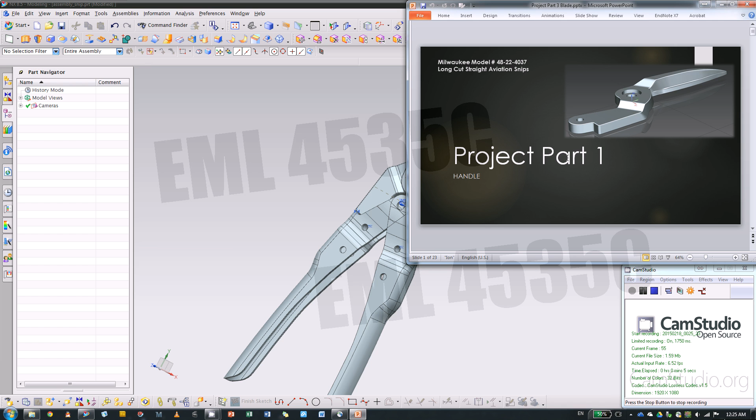All right, this is a video for the third part, the blade. So let's see the parts you'll be making. This is mainly two parts.

One is an extrude, and then the second one is a big swept. Once you finish this, you should be able to get a preliminary assembly, because this is symmetric, so you can just have two exactly the same parts and reflect to the other side, and that'll give you an idea.

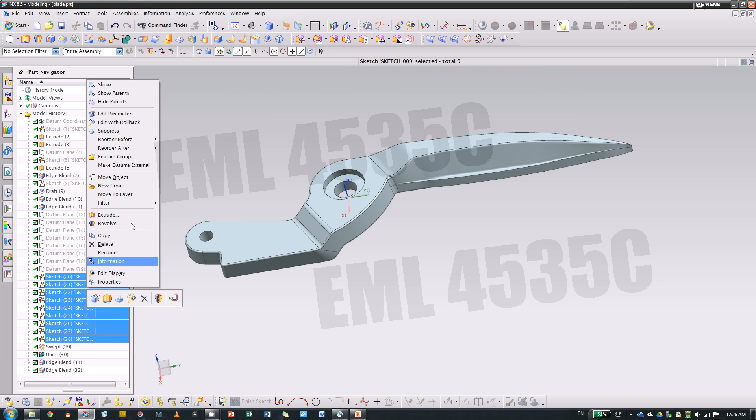Before we start, I'm gonna emphasize on one thing. Although I did say the dimension doesn't matter on your part, in this case the swept is very picky on the dimensions. If your sections are not good, or they don't align well, your swept would fail. You need to really follow the dimension in the slides.

Enough said, let's start with a new file. Model, I just put on the desktop. A blank file. Let's turn off the assembly. Let's leave one, that's the slides.

So again, we're gonna start with a sketch on the XY plane. Let's see the steps. Extrude, then we make a cut to get this sort of a step. Then we make this face a little bit tilted, it's called draft. Next we go for the swept. Those two are the guide curves for the swept.

Then we made seven datums. Why so many datum planes? Well, I need that many to get this shape. I tried three, but they don't comply well. So we're gonna put seven

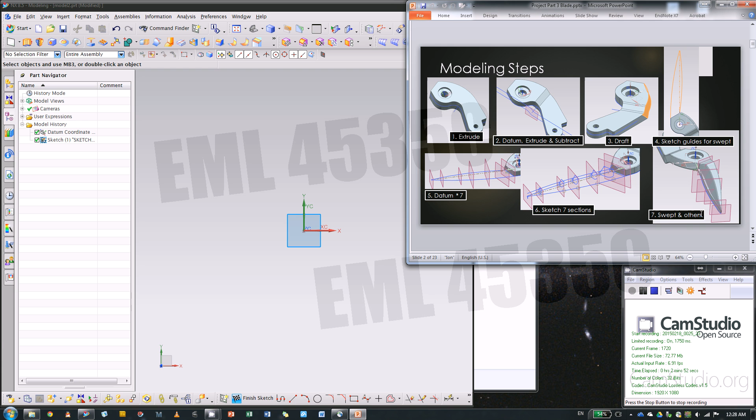sketches on the seven datum planes. Then we do the swept. So that's the major steps, and in between we have some edge blends.

All right, so that's the sketch for the extrude, and we need to zoom in a little bit. So again, the sketch.

Start with a circle on the origin. See, we have a smaller circle, 0.31 in diameter. So that's small, just fit. Then the second one, well this one, 0.56, click.

Next we could just use the profile tool. On the top, go down, then vertical. Then there's sort of a fillet, we can change that to arc. And that's another arc. I'm just going wild here.

And arc, come up, yeah, let's make a tangent. Then this is horizontal, go straight up. The last one is an arc. So that's the basic shape, and this corner is, of course, tangent.

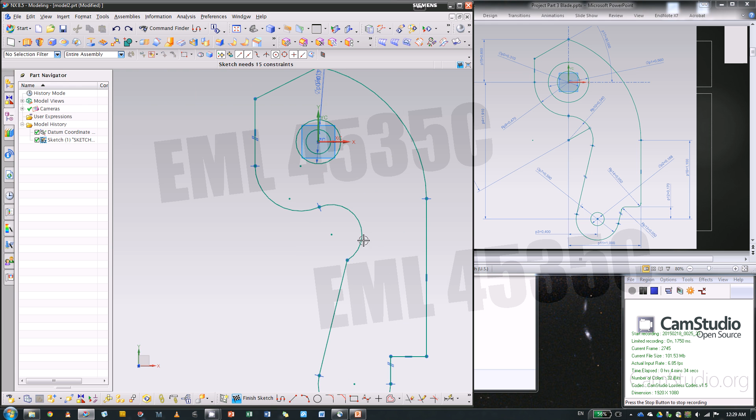Well, this is 12:30 in the morning, a.m. So I'm sort of dizzy a little bit.

So those two are parallel. I'm adding constraints first. Then tangent, that's all good.

Notice the top point, we have a dashed line that indicates this point is on the y-axis, and the same goes for this point. So what we got is point on y-axis. Apparently you can't pick that up, so use geometric constraint points on curve. Then we have 2 points that go on the y-axis, so constrain them to the y-axis.

Okay, that's one thing. Then this apparently should be concentric. Those are mechanical parts, so most of the time they are always concentric. Then the angle is 30 degrees on the top from horizontal, so 30 degrees.

And we have sort of a dashed line here that indicates this point is also on the axis. So need to look for the shortcuts. The shortcut is C. Because it's hidden inside, I'll just use keyboard shortcuts. C, then point on curve on x-axis. Then I think that's all for the constraints.

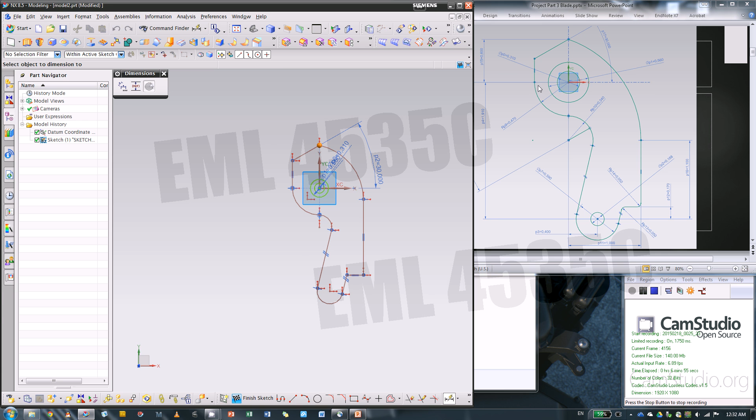Then we're gonna start with the dimension. Vertical ones, 0.6, 1.91. So shortcut, keyboard shortcut, that's D for dimension. From this point to x-axis, well you could click on the point, but it's better to click on your datum axis, which is x-axis, so 0.6.

Then from x-axis to, somehow I lost the zoom. Okay, from x-axis to where the center of this arc is, 1.91. Yep, it's very out of scale, so we can drag this point back a little bit, then drag this away a little bit.

Then we have another circle here, doesn't matter about the dimension. Vertical ones, then those on this side, on the other side, from this point to center of the arc, that'll be 1.1.

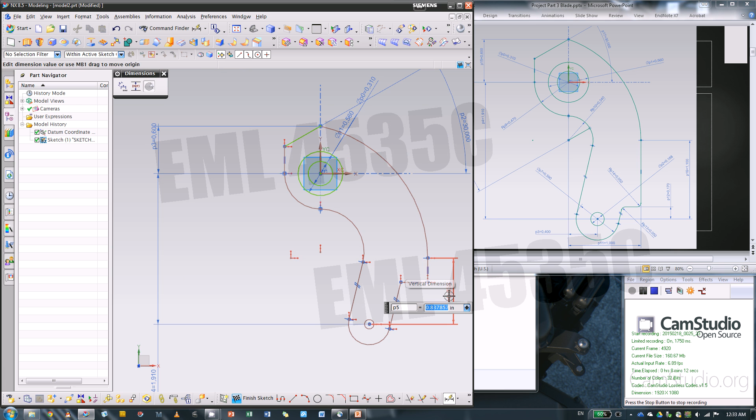Then from this little step to the center of the circle, 0.17, and drag this to position. Then I think we have all the vertical ones. Then we have 2 horizontal. Between y-axis to the center of the circle is 0.4. Then from y-axis to this edge is 1. Okay, that's the horizontal and the vertical.

You can tell the color is changing, so it's constrained. Then if you feel this looks weird, we can...

Add a constraint for the radius first, so add a dimension for the radius. Now it's a radius because it's an arc, an incomplete circle. That was a diameter because I drew a whole circle there. So you can say 0.59 divided by 2, that'll be the radius.

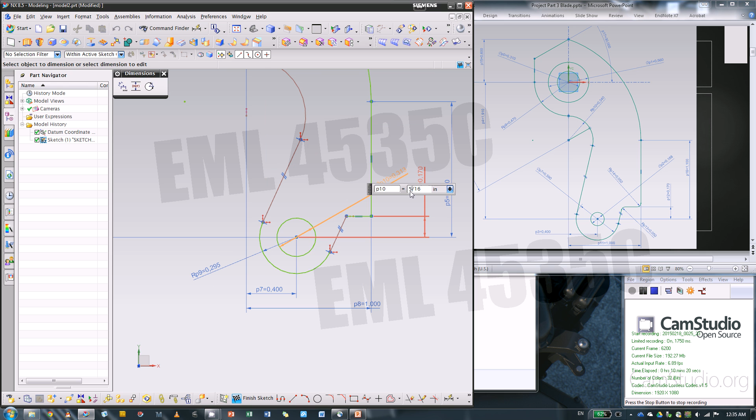For this dimension, you have to match it to the hole on the handle. In the slides, it's actually rounded up, I think it's 5/16. That's 5/16. Enter, escape. Okay, so it's not. Maybe 3, yeah, that's 3/16. If you use 0.188 for your handle, you can use the same info here. It really doesn't matter because it's not very structurally critical.

And you're going to use the model we gave you for the finite element anyway. Radius 0.47, radius 0.34. Looks all green, fully constrained, so we're good.

One more thing is this little line here. That's for the datums, next to cut that step on this extrude. So we need a short line from the center of the arc to be on the arc. I think that was a midpoint. So yeah, it should not be a midpoint. Point on curve is good.

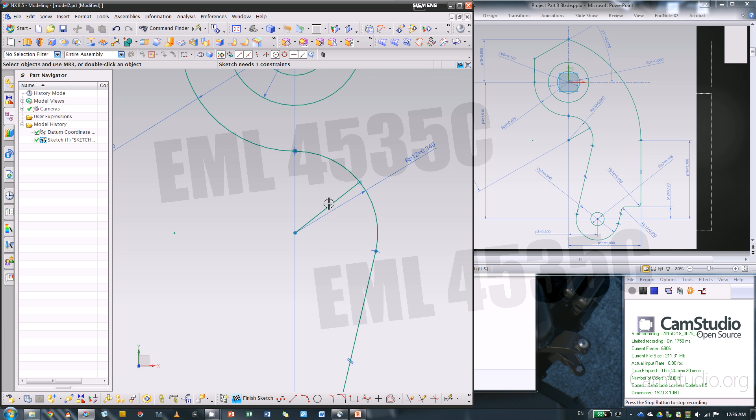Then we do have an angle here, 30 degrees. Somehow my keyboard is not working well. So 30 degrees, fully constrained, looks good.

Then finish sketch. Now we're gonna extrude. The extrude is 0.27 symmetrically. So 0.27, hit enter. Here we're gonna use region boundary curve because we put all the circles in one sketch, so you want to extrude this part, you also want to extrude this part. Well, there's a lot of ways to make this little step here.

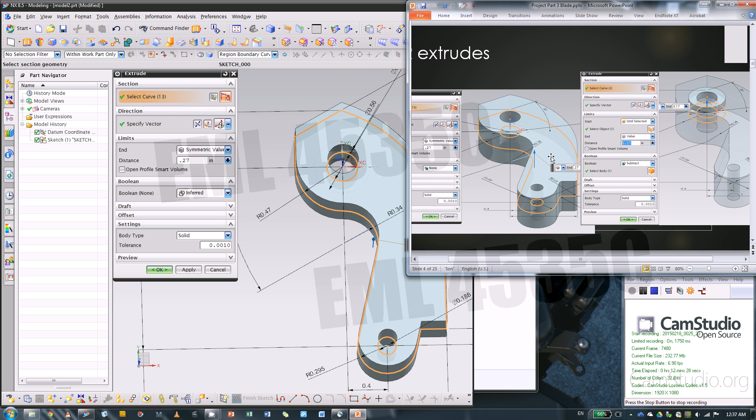I think this sinkhole—anyway, this hole. You can do this in the way the slides did it. You can also do it like this, and next do another extrude for this piece.

So we know the bottom is minus 0.27 because that's a half. Then it goes up to, we have a number here, 0.17, so you got 0.1 inch for the top. Then we can do a unite to this piece.

That's different from the slides. The slides are cutting the top off from the first extrude. Now we're extruding another sleeve inside the big hole. So either way, any way you like it.

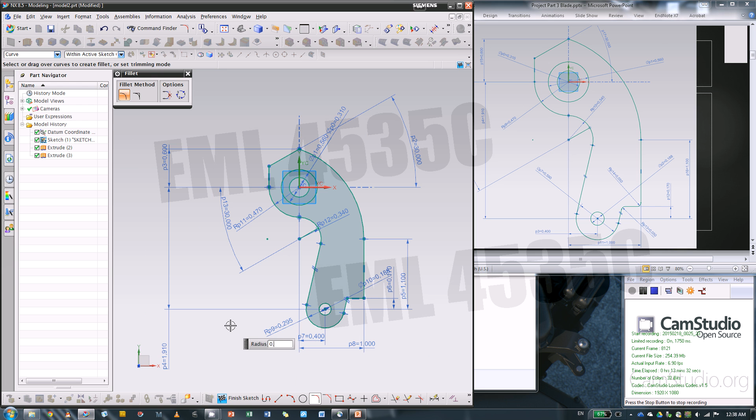I think I forgot some fillets here, so we can go back to the sketch. We have 2 fillets, 0.05, so they're the same. Then we can just type in the radius first, hit enter. From now on, the fillets will be all the same radius, you don't have to enter numbers every time.

Sometimes in the sketch you want to take a preview of how the extrude is going to change. There's your button, update the model from sketch, so it'll update the solid when you're in the sketch.

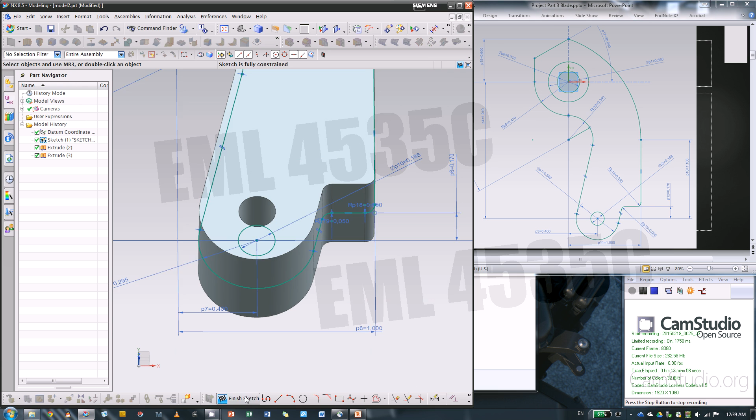Okay, let's go down one more slide. That's the datum to cut this—okay, to make a sketch to cut that. So that's the datum, we're gonna make a datum plane on the curve. I'm gonna change that to on curve, pick this curve, and by the way, don't convert that to reference, because if it's a reference, you can't pick that up.

Okay, so the position actually doesn't matter because you're gonna extrude that sketch in the same direction. So as long as you can cover the whole solid, it doesn't matter. To be safe, we just put it here, and I say OK.

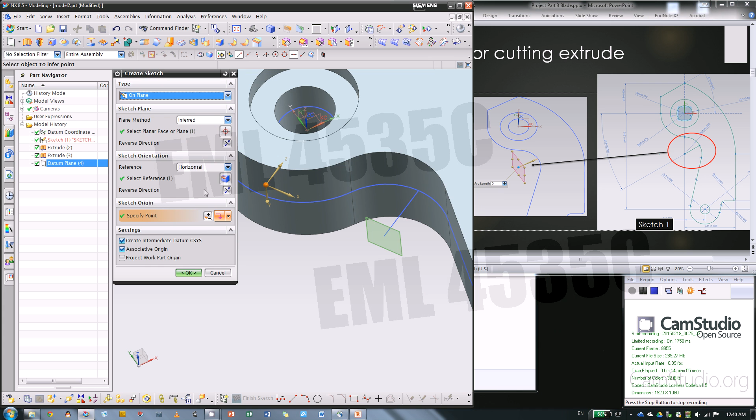Make a sketch on that datum. You sort of have to change the sketch origin to this point. So let's see, that's a sketch. Notice my axis in the slides is different. If you do this way, you're gonna be careful of the sketch—you have to pick the right side, or you can just double click and switch the axis. Okay, so that'll match the axis in my slides.

Then we're gonna start drawing. So profile tool, something like this, then goes up—actually it snaps to the top. If you snap to this edge, you will not need another constraint here. So we can snap to the edge here, go down, then go about the same place, and don't snap to anything yet.

So it's better to get away, draw things away from those symmetry planes, so they cannot snap to something you don't want. And those two lines should be parallel, because this is a uniform thickness.

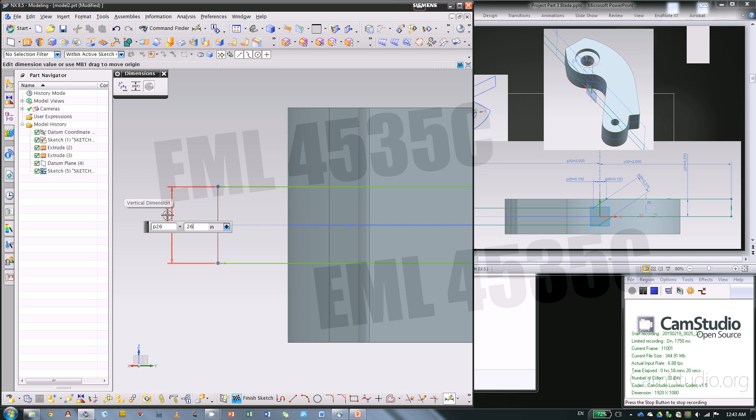And this side is a little bit different, 0.26. Okay, keyboard, 0.26. Then actually that'll be enough for the sketch, as long as this goes outside of your solid. But sometimes you want a fully constrained sketch, so we'll give you that, I'll give a big number, or larger number, fully constrained.

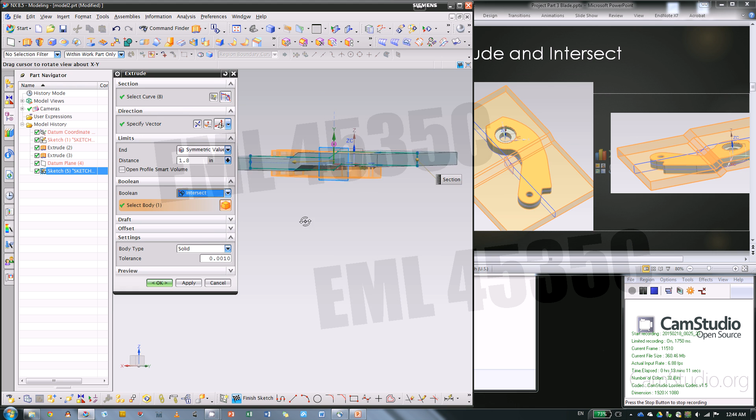Then just extrude, so this time we extrude symmetrically and drag, as long as this can cover it. So that's an extrude and an intersect. So extrude, then here we need to get intersect. This will give us a profile like that, like this. So before and after.

Now we can hide this vertical sketch, we can hide the datum. Next is edge blend. We do need this edge blend because we need to make this edge tangent. This is aesthetic, but it's also affecting the steps later.

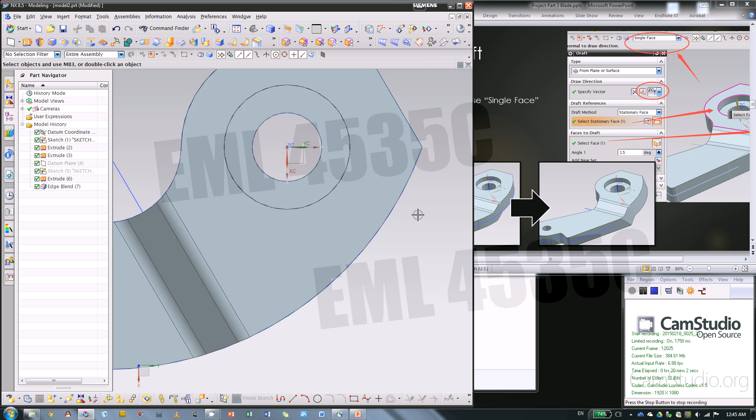0.1 inch, so I have 0.1 here, I don't have to change anything, 0.1 inch. Next is the draft. Notice this face is vertical, this cylindrical face is vertical, and in the real thing it's actually a little bit bigger at the bottom, or it goes outside a little bit at the bottom.

So that command is draft. Let's see where that is. It's all compressed inside, okay, draft. You can tell from the symbol or the icon. So specify vector, it's the angle from which vector, so you can just put it on Z, okay.

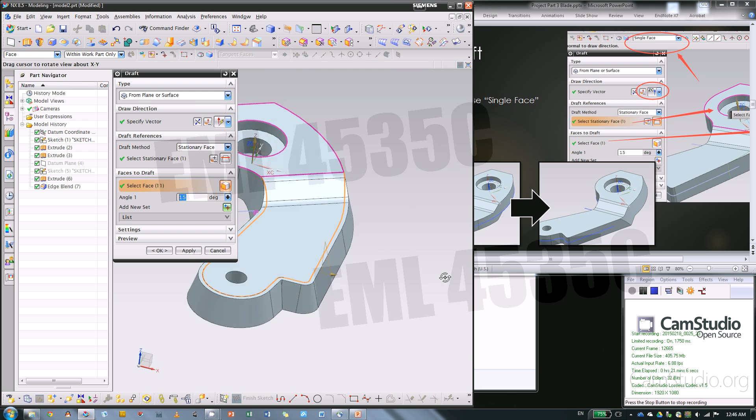And the stationary face is the top face, and this face will stay the same. Then the face to draft will be this face. And the angle is 15 degrees. Let's then hit enter, and you can tell from here all the face on the edges.

So 11 faces, we don't want that, we just want one face, so change that to single face. Pick this one, okay, only this side goes out. And ideally it's actually not a uniform degree, it's 15 degrees at that point, and this actually blends really smooth here. Ideally it should be a swept or some other thing, but we can just do this.

Okay, actually let's try something else, add a set, pick this point, this face, try 0 degrees. No, I don't like it. Maybe 1 degree. No, okay, we'll just do this.

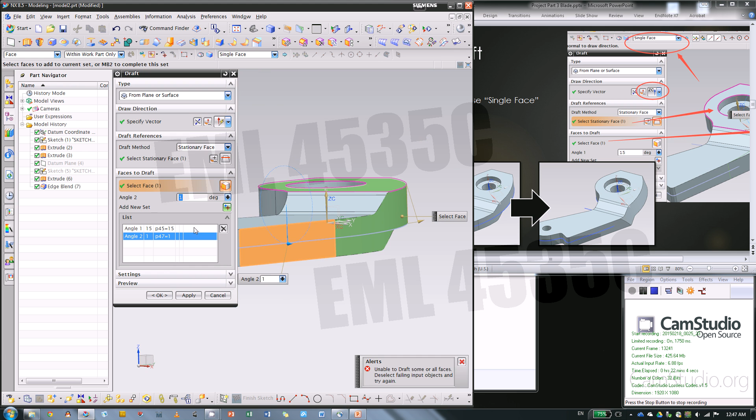F8, now you can see the face from the top. Okay, so that's the draft.

Then next is a sketch for the sweep. Again we're going to draw on the XY plane. I guess you don't really have to pick a plane as long as you're looking normal to the plane, X, Y, or Z, it'll automatically create the sketch on that plane. Alright, so we can hide the solid because this is using the first sketch as reference.

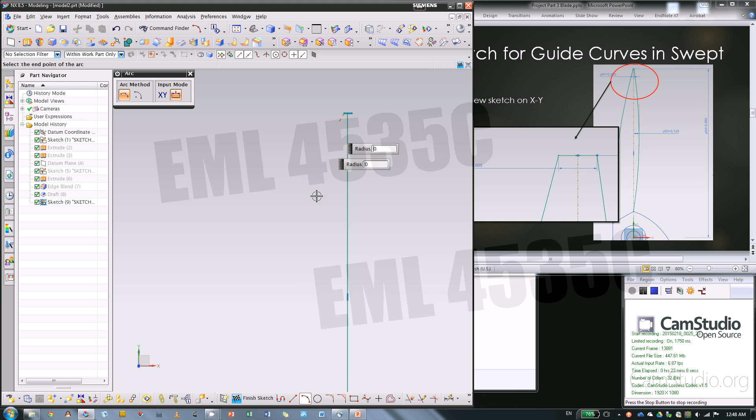A reference line, vertical, going up, and there's a dimension there. Then we have another line that's sort of like this. Then two arcs, one arc is on the left side. It's got blocked here, it actually should be tangent.

And you should know that most mechanical parts, if the surface connects each other, it should be tangent. You want something to be smooth, you don't want your product to be very pointy or something. Then another arc, so the center will be the reference line. Those two on the sides are the guideline for our sweep.

Then here you have a point in the middle, so it's actually a midpoint constraint. That's why this line is centered. Then we have a dimension for the line here, it's 0.125.

And also we have a dimension from this line to the axis. So click x-axis. That'll be 3.86.

As you can see, the line on the left is constrained, the line on the right is not. So we add a dimension between them. When I click, you notice you want to click on the outside of the arc. If you move inside, it's gonna snap to the arc center. So if you do this, that'll be far away. So it's the little things that matter. You have to click outside of the circle to pick the arc, or you can just turn it off. Turn the arc center off.

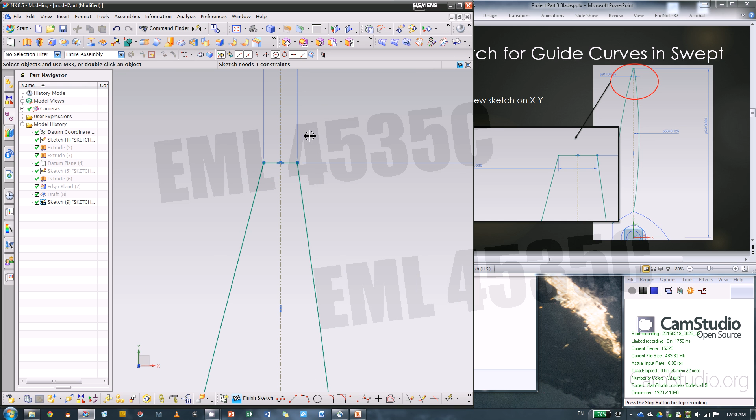Okay, so this is point 125. That's the shape we want. It needs one constraint for the reference line. If you don't like that, trim this off. It still needs one constraint. Let's see what happens.

Actually, I don't see anything. Oh, there's a point, okay. We can delete that point, and it will lose the midpoint constraint. We'll put that back, just for the sake of being fully constrained. And finish.

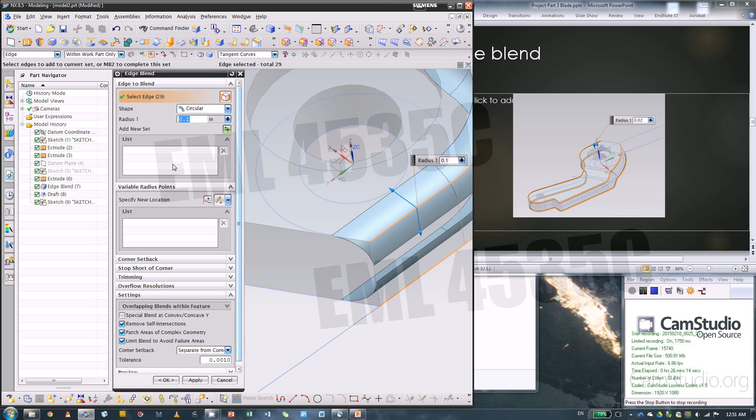So before that, we have some extra things to do, and this is critical because this face has a sharp corner here. After we make the edge blend, this top and bottom, 0.02, hit enter, should go all the way through. If it didn't, that's because I skipped one edge blend in the slides.

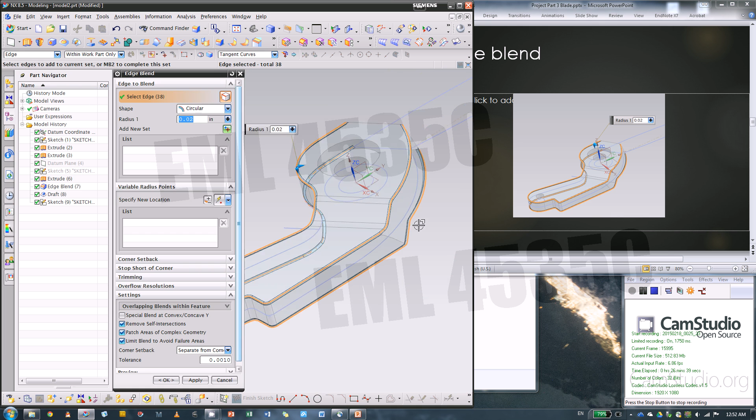So if you're following the slides, 0.02, pick the top and the bottom edge. It doesn't go all the way through because it's on a tangent edge. You can pick those two. Okay, that's the way the slides work. Then I put another edge blend here just to look a little bit nicer. You don't have to do this.

Okay, so let's see. That's not right, should be point. Nope. So that's why I didn't put this in the slides. But let's put it like this. Okay.

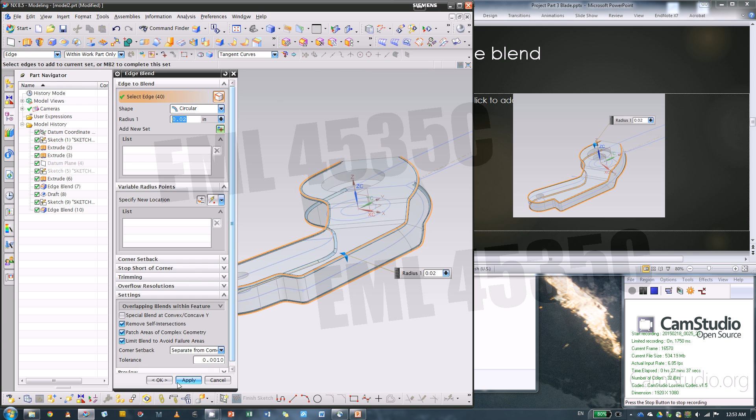Then the top and the bottom. So you can tell that now it's picking up the whole edge, because with this edge blend, this top and the bottom will be tangent curves. Okay, so the point of this edge blend is to get this surface, or this cross section, fillets on this cross section, because later on we're gonna have the fillets going into the swept, and it's really hard to do edge blend after you have a swept, because this is a complicated thing, they call that complex surface. It's hard to do edge blend. The computer can't figure it out.

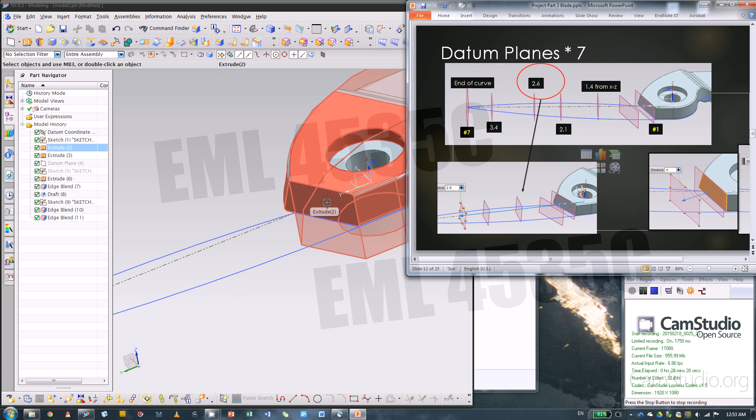Okay, we have 7 datums. This is the hard part, or the important part. We have the first 2 datums at a distance from this face. We pick the face from this face. Then from the 3rd to the 7th are at distance from the XZ plane. So 1.4 inch, 2.1, and so on. And the last one is the end of the curve.

So the first 2 you can just get a datum, inferred or at distance, same. And then type in the distance, 0.05 for the first one. Then again from the same face, 0.4 inch. Okay, so those 2 will generate.

Let's go to the top. This edge, okay, this edge should not be parallel to the x-axis. This edge is actually at an angle. That's why we have these 2 datums at angle. So this will form something like that.

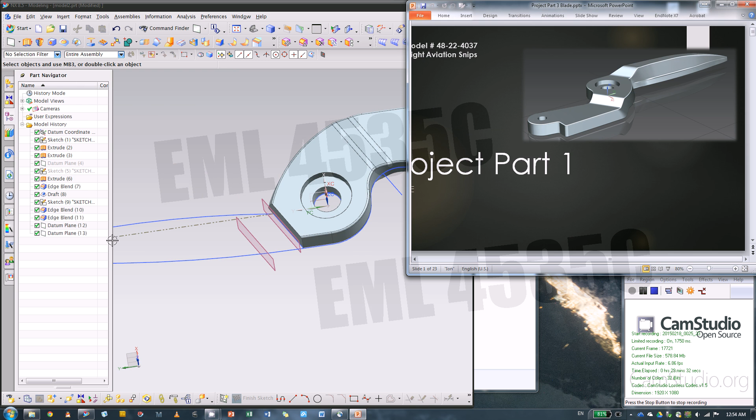Now we need to find the slides. Okay, then the other 5 datums. Okay, datum. Now we can hide the solid, so it'll be a little bit easier to snap to pick the XY plane. Then the first one is, I'm sorry, XZ plane, 1.4. Apply the second one, 2.1, and these dimensions, they matter.

I tried different dimensions to get the proper shape, so you do want to follow this, otherwise your swept is gonna be funny looking.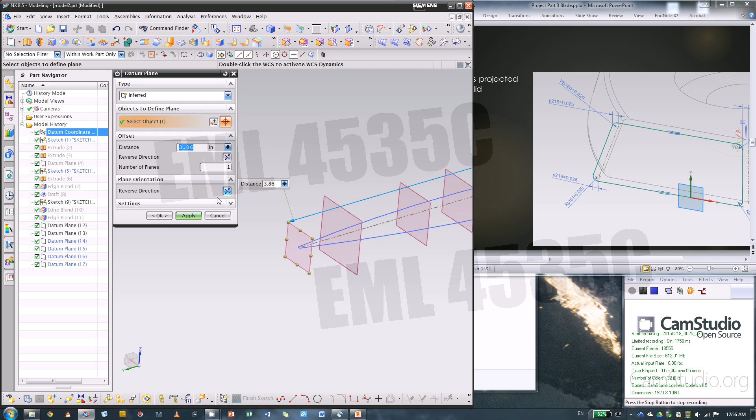And the last one is from here, but I didn't give you the dimension here. Actually, if you look at the sketch here, you do have a dimension. You can use that dimension, or you can simply just drag this arrow and snap to the end point of the arc. That'll give you the same distance from the XZ plane. Okay, so that's for the datums.

Then we have 7 datums on 7 sketches. So the first sketch is on this one. Now we're gonna start a sketch on the datum. Coordinate system doesn't matter.

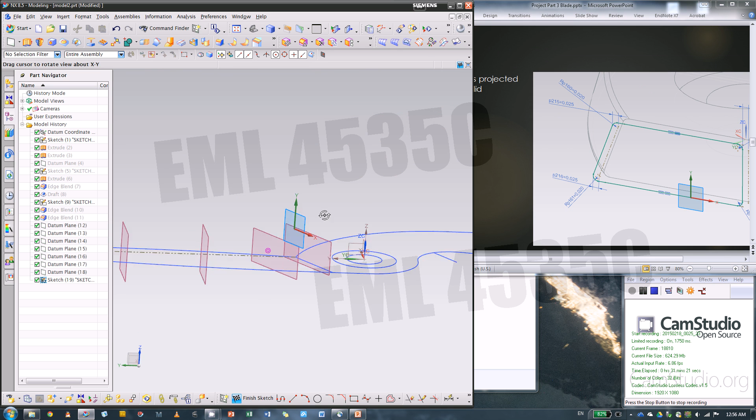Show the solid. So we're going to project the curves from this face, then move this 0.025 to the left, because our data goes out a little bit to the right side, so we compensate for that.

Let's project a curve. I just want, well, connected curve might work. Actually, you can use face edges, just pick the face and it's going to project the whole thing, but all we need is the 4 edges.

So you've got to be careful, you need to pick the edge. If you pick that line, it's going to pick the whole sketch. That's your first sketch, and apply. Then we have 4 lines. You can turn them into reference, so you don't change them.

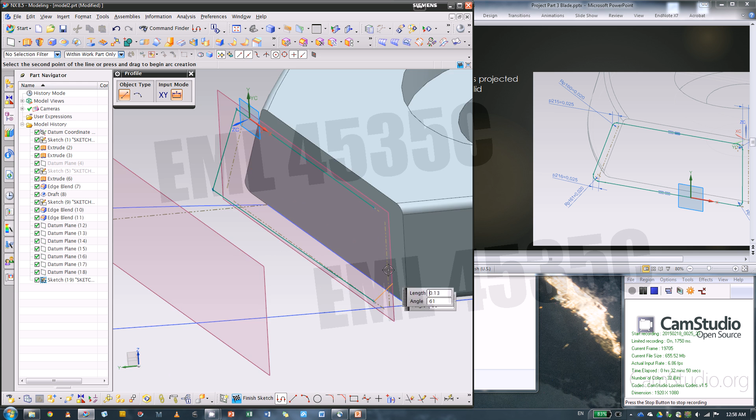We can use the profile tool someplace on the curve, starting from that, then go overshoot, and we can touch the line a little bit to see if it gives us the option to be parallel. Obviously it didn't. Then we end up on the point again on this line and close this loop. Then the top line, I think it's not collinear yet, so we're going to make them collinear.

So from now on, I'll sketch from the 3D perspective, since it's a little bit clearer than drawing like this. Of course you can hide the datums, but hiding 6 datums every time and showing another one is too much work. Also, this view gives you some idea of the relative position of your lines with respect to the bottom sketch.

You can't dimension between these like this, because this is actually not a straight line, it's a spline, as you can tell. So they don't have a distance between them.

So the closest thing you can do is get a distance between those 2 points vertically, 0.025, and the same goes for the bottom, 0.025.

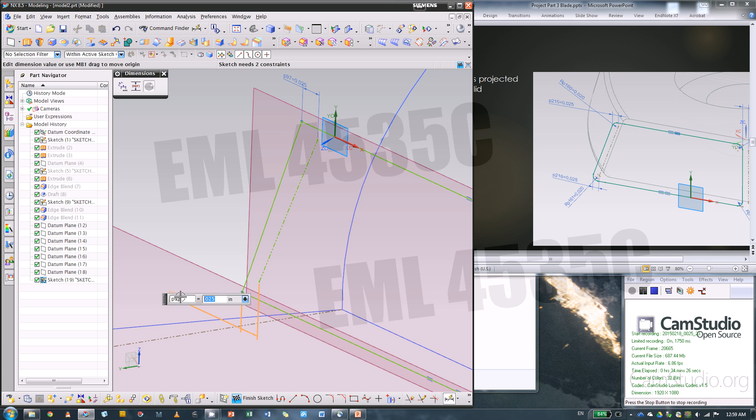And if you want to take a look, Shift F8. Yeah, doesn't look that well. Maybe we should put a fillet first.

So fillets, 0.02 here. It's better to just click the corner point. Okay, that's this one, this one.

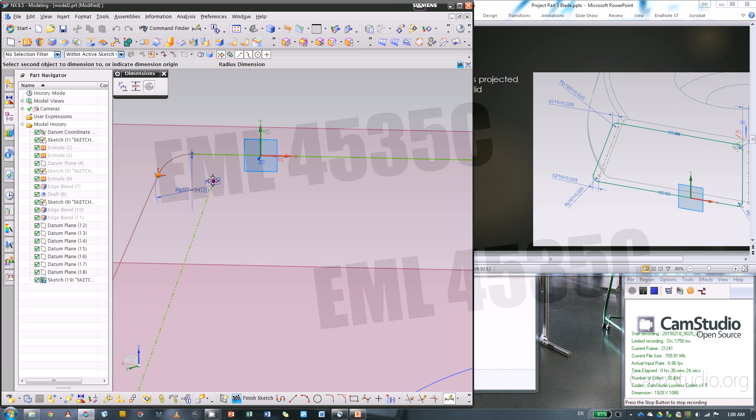Alright, then dimensions. Dimension from this point to the end point. Vertical distance, horizontal distance 0.025, and same goes for this.

So it's not exactly uniform distance between them. Then we have from here to here. You don't want it angled, so before we do that, we make this vertical. Then the distance between them is...

I think we have some constraint automatically added. Just turn that off, delete that, there's sort of another constraint, delete that. Now it works well now. 0.025.

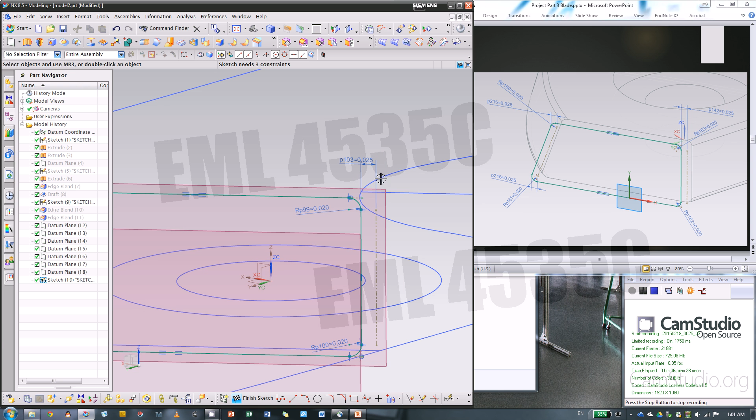Okay, because I think it automatically added a point on this curve. So that's the reference projected curve. It will conflict with this dimension. Anyway, so I need 3 constraints. Let's see what happens. Turn the dimension on.

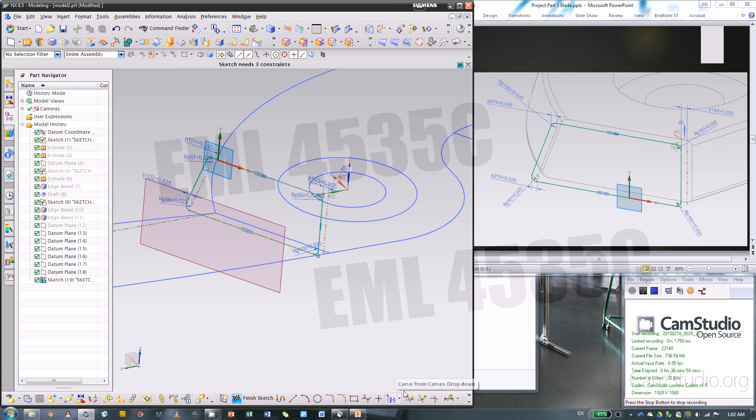Yeah, I think we modified the projected curve, that's why it's moving. And there's a point, so it really doesn't matter. Finish sketch. That's for the first one.

The next is on this datum. Start drawing. Origin doesn't matter. If you want to, I guess you can snap to the origin, or just leave it there. It'll automatically put this x-axis on the xy plane, so it's pretty good already.

Because we need those 2 points from the guideline anyway, so we need to find the intersection point of those 2 lines within this datum plane. We use intersection points, and this tool is funny, you can only do this 1 line at a time, so you have to do 1 point or 1 curve, apply, and another point.

So if you notice, we have 2 little crosses on the screen, and it doesn't zoom in as you zoom in, it keeps the same size, so you have to find them when you can, and turn them to reference so you can see it better.

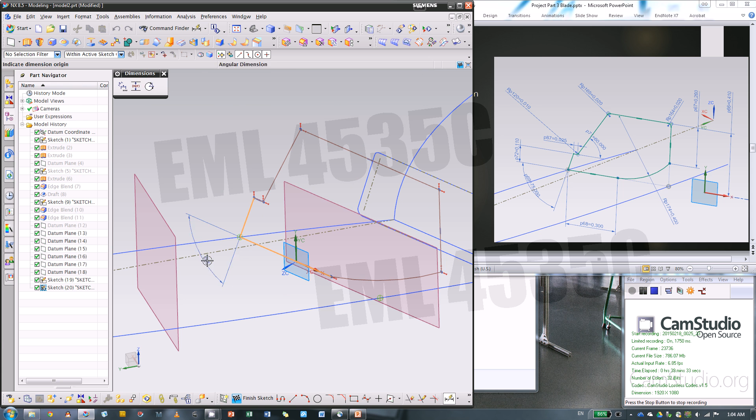That's the basic shape. Then we add dimensions. Dimension, first the angle is 75 degrees for this side. Then between this and the horizontal line here is 60 degrees.

And let's see, we can now add vertical distance. This is 0.26. Then from top to bottom is 0.41. What we have more vertical is on the other side, this is 0.11, and we do have one more horizontal distance for this gap, which is 0.025.

Okay, if you notice the dashed line here, that means constraint, right? Now we're going to constrain those two lines onto this point on curve. So that's the dashed line.

Then we have a radius for this arc, which is 0.4, and this radius does matter for the bottom surface. Let's see, this can still move because we didn't have this P68. At the bottom is 0.3.

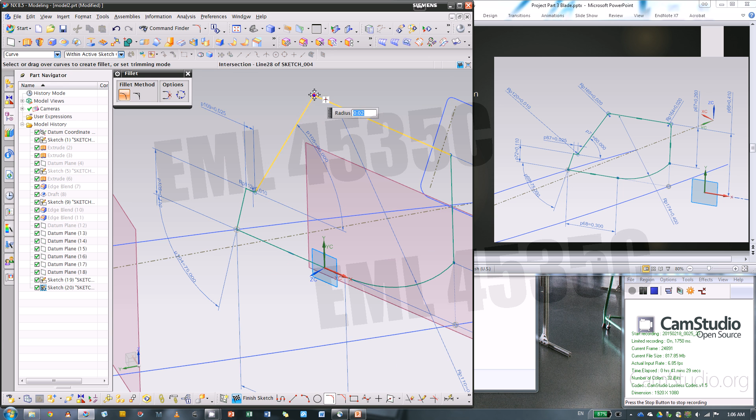Fully constrained, then we need to add 2 fillets, which is 0.01 at the bottom on the lower corner, then 0.02 on the higher corner. Fully constrained, finish sketch.

So this will be the same pattern in the next couple of sketches. So next one, and you notice it's pointing the Y downwards. We can flip that so we pretty much view from the same direction. That was determined by the normal of your datum by default. Usually the sketch normal direction of your sketch is the same as your datum.

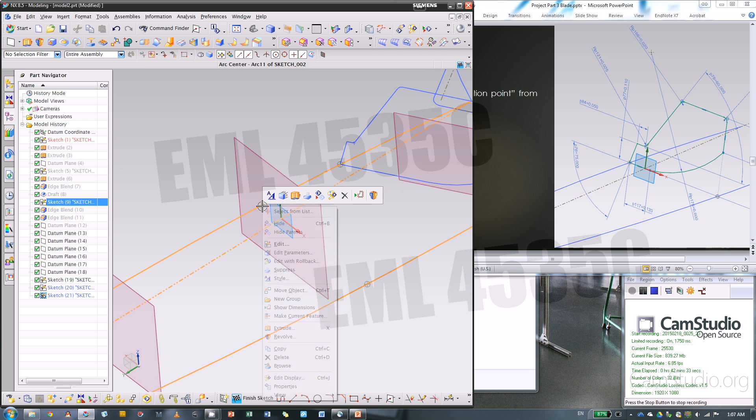Let's see if it's the second. Then we go page down to the third. Okay, that's the third. Now again, first step is find the intersection point. Apply for each curve, and turn them into reference for easy viewing. Then make the same pattern somewhere from here to the point.

Then we'll go up 75 degrees coming horizontal, go up, don't want to snap to anything, so make this horizontal. Yeah, that's horizontal looking from this angle. Then go vertical, the last 3-point arc. Okay, and this is not horizontal yet, so make this horizontal. And again, we have point on curve constraint.

So this way the right side is always aligned with this guideline. The left bottom corner is always on the other guideline. Then dimension angle is always the same, 75 and 60.

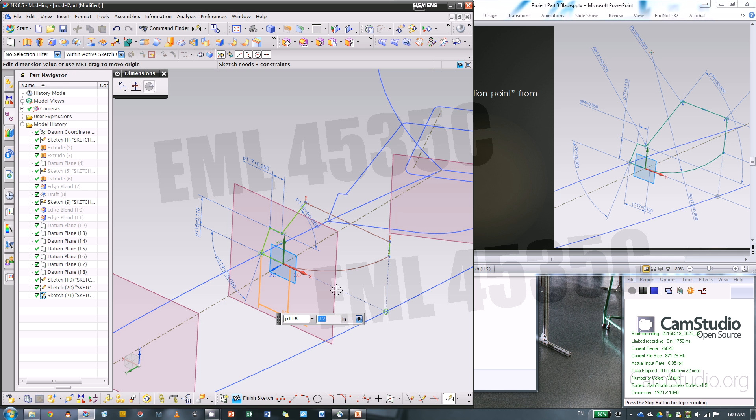Now let's see. And its height is always the same, 0.11. It's sort of like at the blade distance, and that's 0.5. Then we have another one should be at the bottom, 0.12. Okay, 0.12. Then the radius, 0.6.

Then it goes up, so we can drag this line up a little bit. Control Z. Okay, you can actually hide the first couple of sketches, we're done.

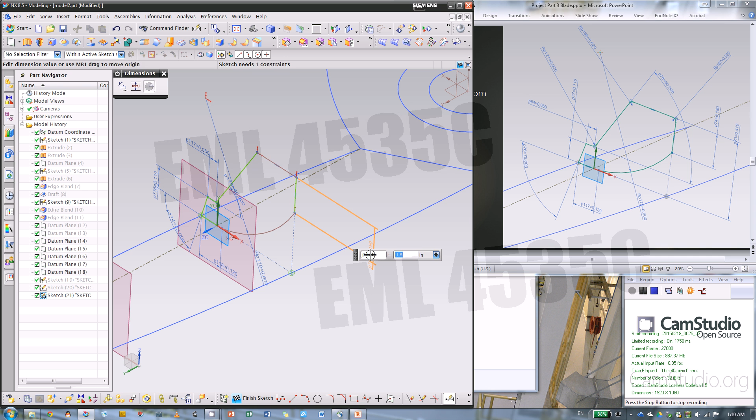And let's see. Okay, dimension, distance of this 0.18. Then from top to bottom, which is the x-axis, is 0.41. I guess this 0.41 will be always the same. And fully constrained, let's take a break in the video.

Okay, coming back, the third sketch is done. And the finished sketch, you can hide this, hide the sketch. That'll be the fourth sketch on the datum, and changes the coordinate system, the axes. Okay, the fourth. So this time it's viewed from the orthogonal, the normal direction, but we still have the same procedure.

First, find the intersection point and turn them to reference. If I can click on the point. Yeah, see, once you have this on, it's hard to click things. But it's also neat when you want the start center. Okay, and the same procedure. Let's see.

From the bottom, go up, one step, go up, horizontal, go down, vertical, and arc. And done with this, make the bottom horizontal, makes bottom and vertical line go through this point on curve. Then did we put fillets there? We didn't put fillets there yet. Okay, anyway, let's finish this sketch first.

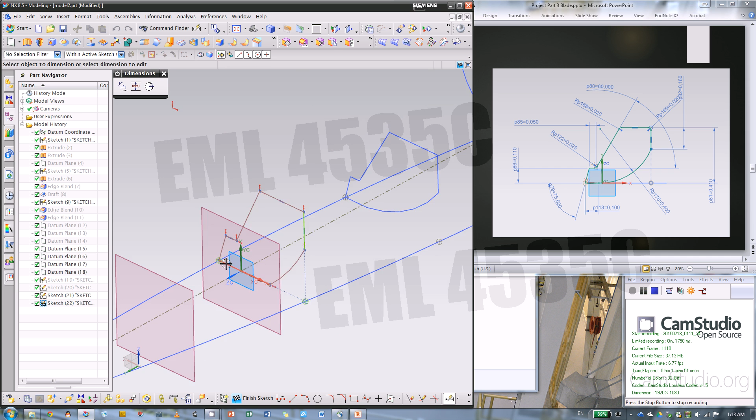It's 75 degrees, 60 degrees, and we have the step, the same height, 0.11 inch. The total height, still 0.41 inch. Then this change, 0.16. And the radius of the arc is 0.4.

Then what we have is this little step, 0.05, and the bottom line length 0.1, and lastly is fillets. We have 1, 2 fillets, and they are different in radius. 0.025 for the bottom lower one here.

Okay, finish. Then we'll go back to the third. Okay, to add the fillets. Fillet. Then 0.2, 0.25. At least they are the same across different sketches. Then 0.025.

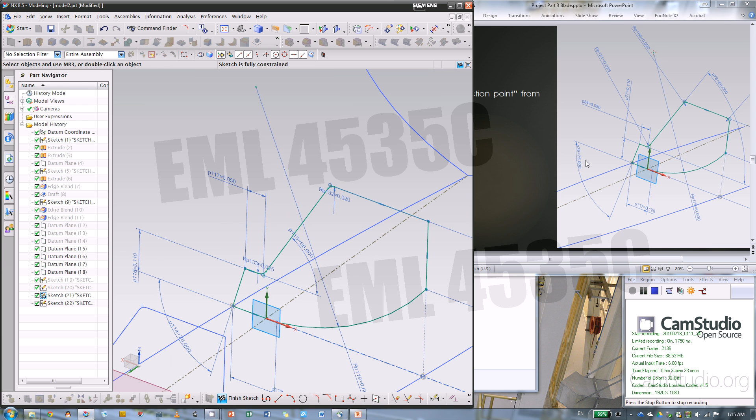And this corner here, it's 0.02. Yep, we have a lot of sketches. Show them. See if we have the fillets here. We don't have it here. I still need to go back. 0.02. This actually connects to the fillet we did on the solid. So 0.02 for this corner.

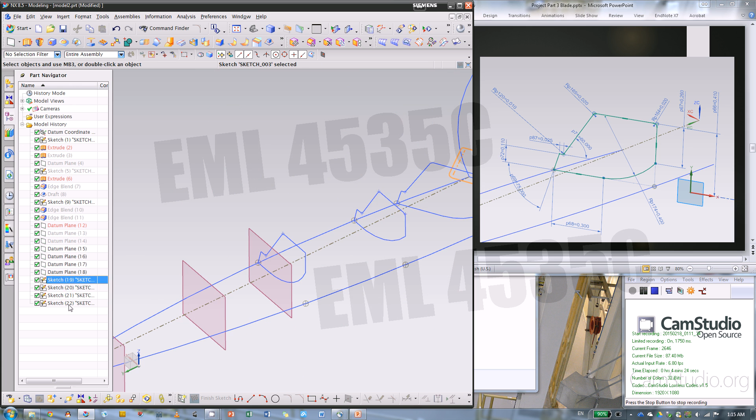So 3 fillets per sketch. Gotta remember that. Then height. What else? That should be the 5th sketch on this datum. Switch Y direction. Okay, first step, intersection point. Apply. Y, and where's that? Should be here.

Reference, and turn that to reference. The next is the shape.

Let's start from here, again 75 degrees, one step to 60 degrees horizontal, go down vertical, then 3-point arc, then make the bottom horizontal. This should not be parallel, this should be horizontal. I think we got the shape.

D dimension is 0.11, and the bottom is 0.14. Angle here 75, angle there 60. Then this little step is 0.15. The total height to x-axis is 0.38.

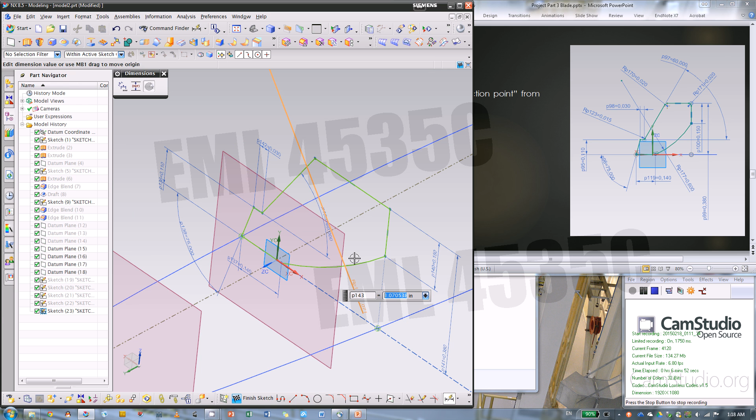Needs two constraints. Two constraints means this bottom line and the vertical line here goes through this point. Still need one constraint, that's for the radius of the arc. It's 0.06 inch. And we're down here.

I think that should be fully constrained. This one is also fully constrained. Control B to hide. We have 3 sections to go. 1, 2, 3, 4, 5.

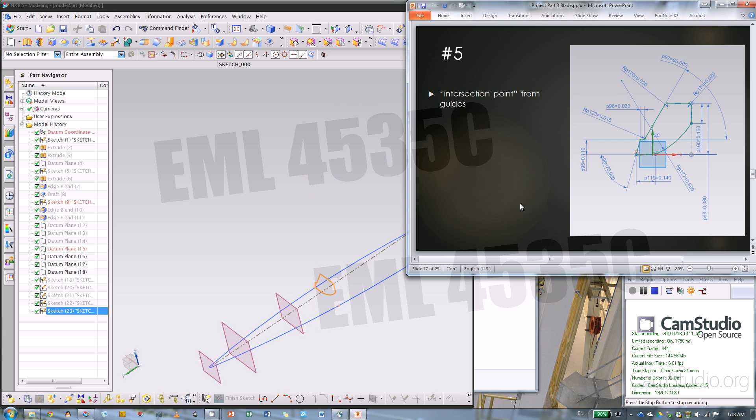Let's take a look, show everything first. Okay, sadly we put this one on the wrong datum.

So what we do here is make datum external. Okay, we can just leave this sketch. Then what we do, can we turn this whole thing into reference?

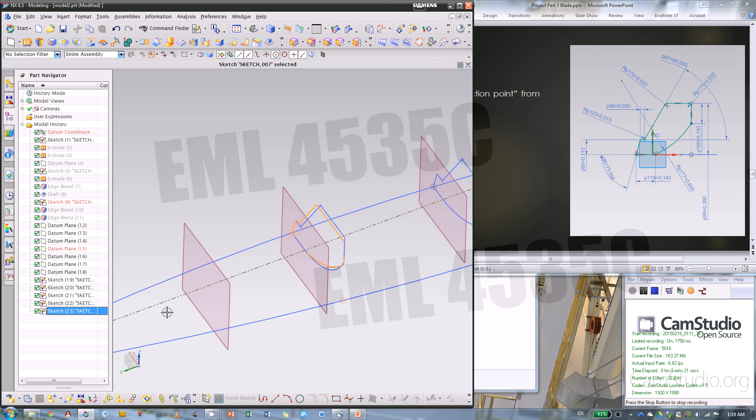Well, you have to go through this again. So first project intersection point, then turn to reference, then start drawing.

Go up, not parallel, then this horizontal, this vertical, then there's horizontal plus 3-point arc, and bottom and vertical line goes through the point.

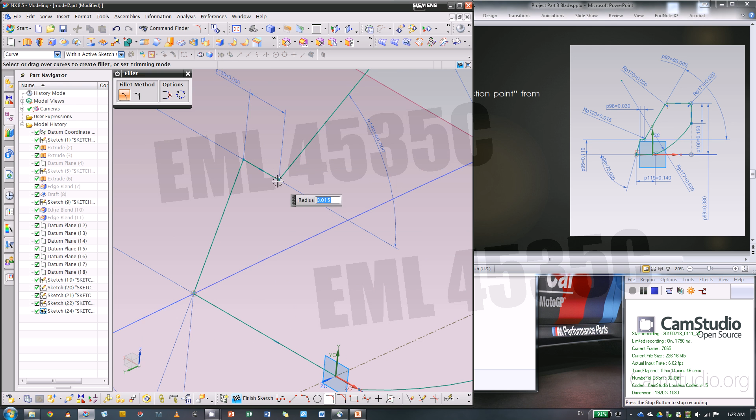And the fillets. So we have 0.02 for those top two corners. It's not right, just make sure you click on the intersection point. Then 0.025, or this time we change to 0.015 for this corner, because it's getting to a smaller region.

Fully constrained, finish sketch. Then we have 2 sketches to go. Yeah, it's still the same thing. It's still pretty boring.

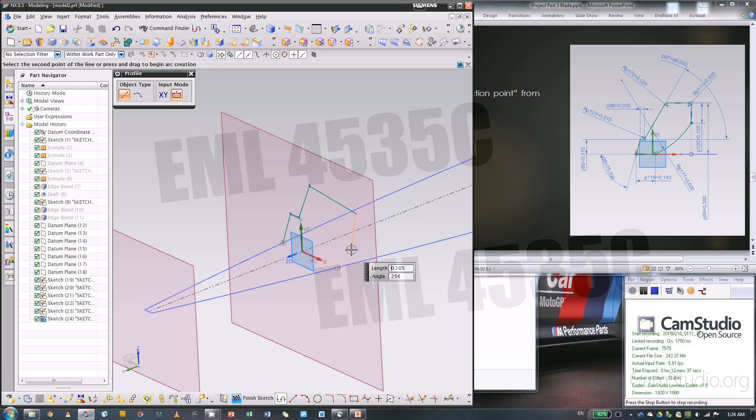Go up, let's see, horizontal, that angle. Oh, didn't get horizontal on that. Vertical. Then this is horizontal, 3-point arc. Then we get that back to horizontal. Those two should go all through the point.

Then dimension 0.11. Yeah, we should go down one page. Yep, 0.11, and the bottom line is 0.15. Then this vertical line is, let's see, 0.24, right?

This dimension, 0.24 is all the way to the bottom, so this is 0.14. 0.14, 0.24 from the top to the bottom. And we have this gap here, which is 0.01. It's really getting too narrow a place.

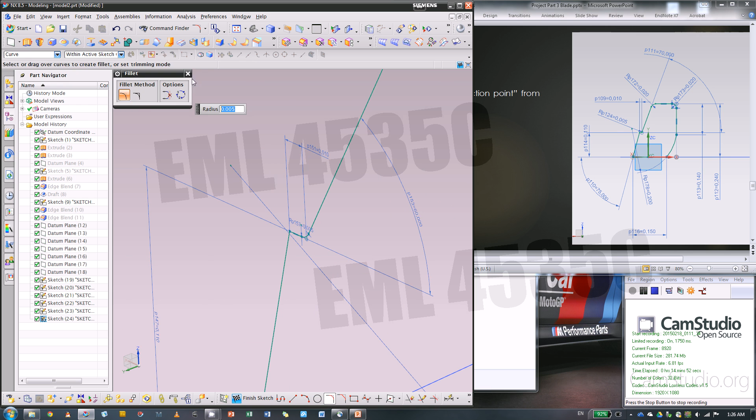And do we have anything here? Yeah, we have a really small fillet here, which is 0.005, and fully constrained. The sketch is done.

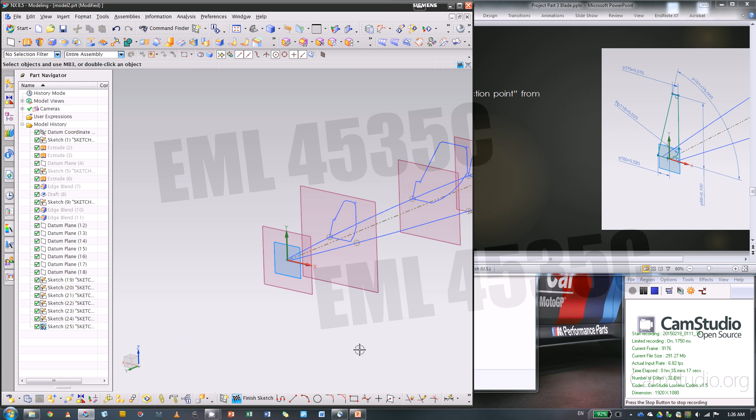Now we have the last one, almost there. So last one, sketch on this. Switch the y-axis pointing up, and it's easier than other things, so probably don't snap to anything just yet.

Then dimension from point to y, 0.02, and the top is 0.01, height 0.1, and 75 degrees, don't forget that.

75 degrees, and the bottom apparently should sit on the x-axis, and I think it's fully constrained, but don't forget fillets 0.02, for this corner. Finish sketch.

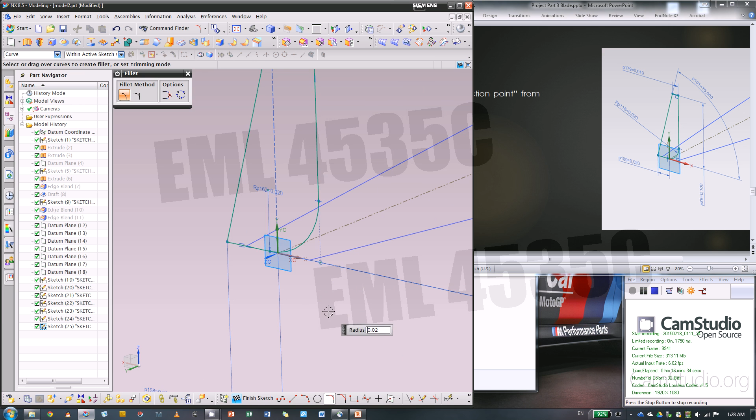Now let's hide the datum. That's all the sections. Now we need a starter guide, which is this plane, the XZ plane.

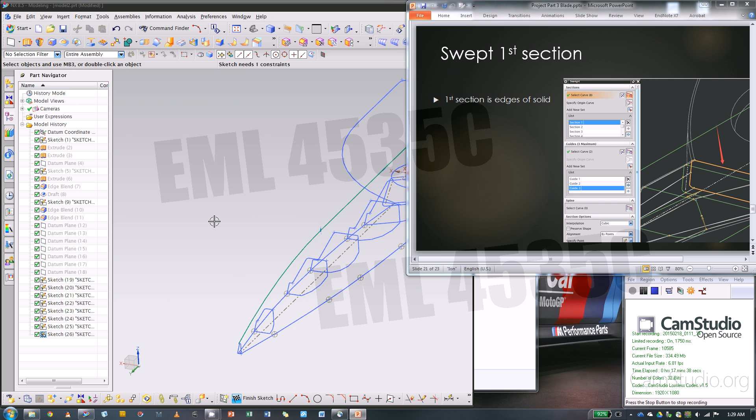First straight line from the fourth, from the little side, so top of this - just a straight line, snap to the top, go over the axis, then the other side, 3-point arc, same point, and this point, make a tangent here. Bear in mind that the guide curve always has to be tangent, so you can see pretty much the frame here.

So as we said before, the swept feature has 8 sections, out of which 7 are sketches, and the first one is actually the face on the solid. So for the select curve, connected curve for this one, the very first, you can use face edges.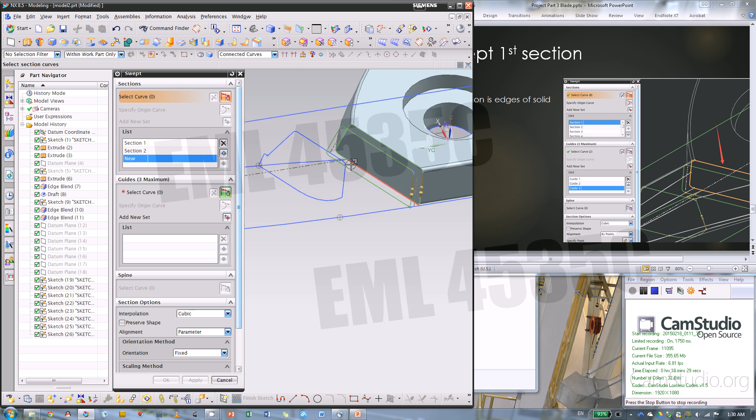That'll give us this. Let's try to specify the origin curve the same way. Then we change to connected curve. Now we need to click on the same position of a sketch so they align together for the origin curve.

Another one, hopefully this will come out nice, but pretty much you have to do a manual point alignment for the curve, the guide curve. The first one looks ugly, then new set, second one a little bit better. Then we can add the third, right here, and take a look at the alignments—it doesn't align well. Of course, because the sketch is too complicated.

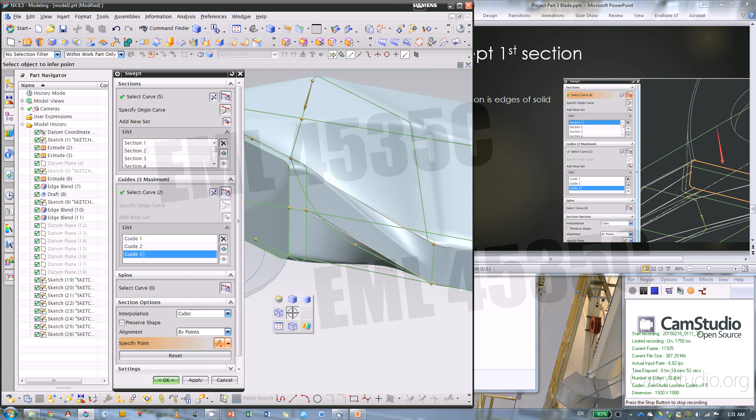So we can use points here. Now this is the hard work, the headache. You need to align this point from the bottom of your first two.

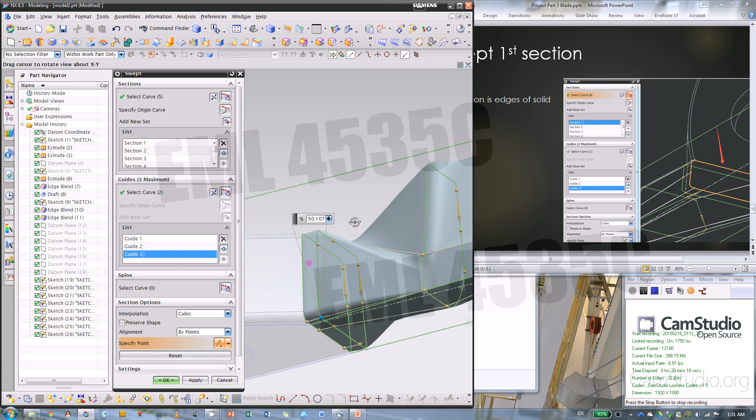For this alignment, there's really no good way to tell where—just eyeball it, sort of in the middle. That looks fine. Then for this side, the only difference is we want to make this all the way up, so you have a nice curve at the bottom.

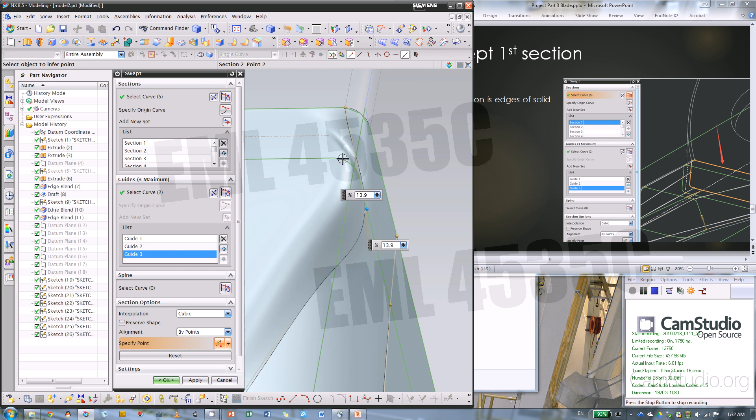So we're just adjusting the alignment points, the key points. For this edge, you want to make this point go up to the end point of the fillet. Also this point too, so they line smoothly with that, and we can move this a little bit higher.

So this is really aesthetic, and I understand this is pretty complicated. If you have a hard time doing this for the homework, you really don't have to make it 100% perfect.

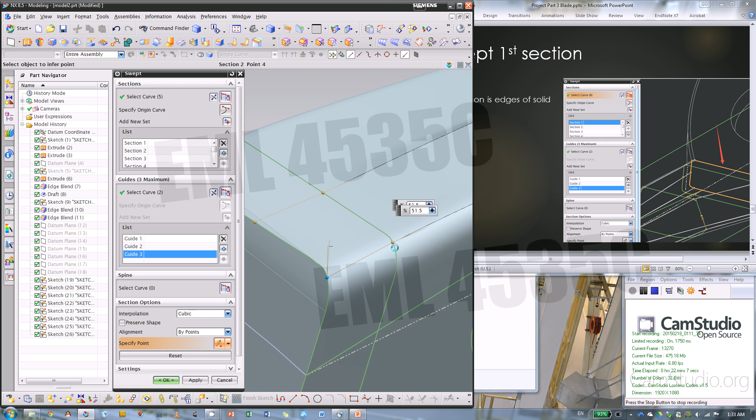So here we can put those two points around the midpoint on the fillets—really depends what you want. Then for this edge, it will go nice along this edge, and I think we need a point on the top for those top lines. So we can add a point here.

If you click, it'll add another point. You can drag that new point, so you have more control points. Notice I wait to see the snapping point, so I know exactly where this point goes.

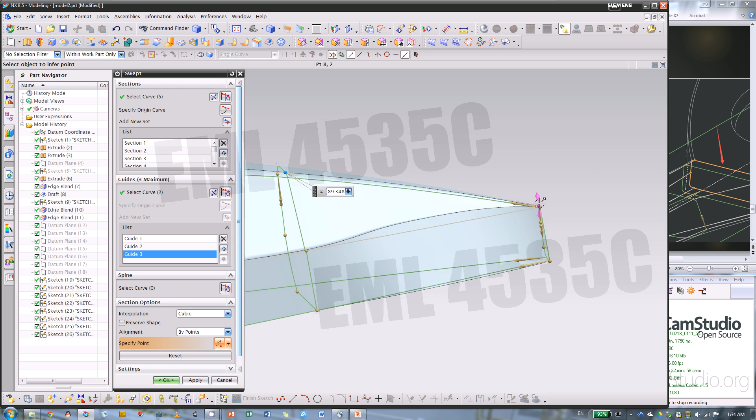Looking here, we want this to go down, top stays on the top. We can adjust this curve a little bit to see if the curvature looks natural or not on this side. Then what about this align point?

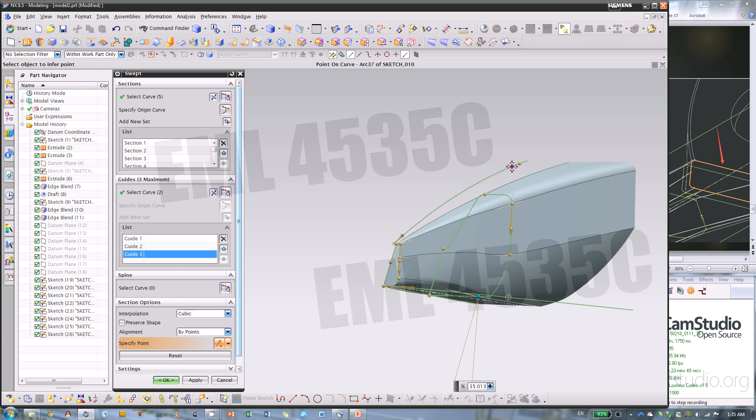So this point, you can move this thing a little bit, and honestly this is our aesthetic, as long as this whole piece looks nice. Let's do a fit—where's my fit?

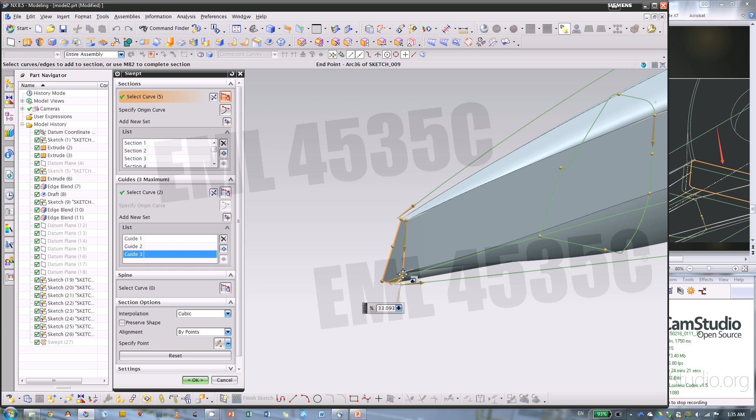We can do okay first, so you save the swept, otherwise you adjust for a long time and then just lose it—that's painful. So we can make this go down to the fillets. Then what about this side? Now this point.

So now this point goes into which side? Let's see. We can make that go to the bottom and take a look at the surface, and we can also hide the sketches.

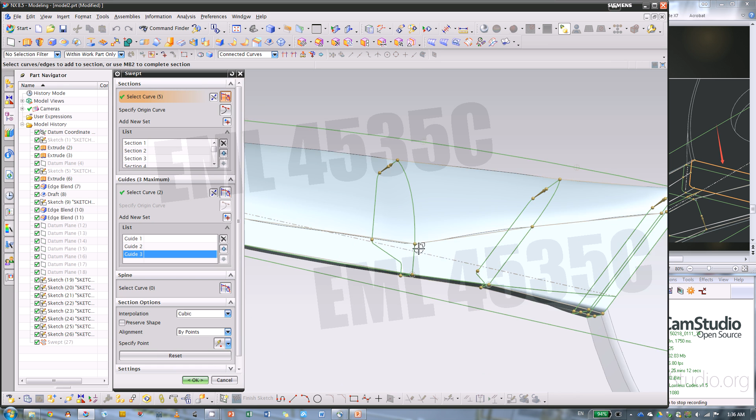Okay, so it's a little bit—this point, you can move this point a little bit out, or change the sketch to make this a nice arc. So for now, I'm happy with the results. Look at that, it's actually pretty close to the real thing we have, except the tip a little bit.

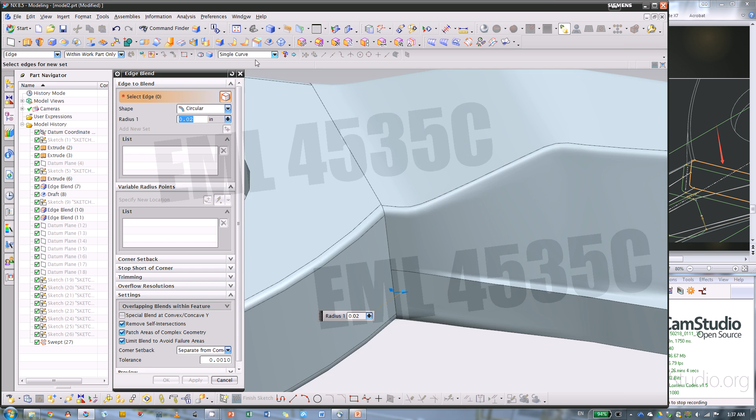So next step, we need to make an edge blend here. This one is really needed because you don't want that sharp corner here. So pick the edge, not everything, so not tangent. Deselect—we want a single curve from here to the bottom.

Then we have to pick this as well. Well, the thing is we need to merge those two first, right? Those two solids—otherwise the edge blend just goes right into the piece. So we're gonna unite those two pieces.

Then edge blend, okay, so now it's different now. We can pick the top and pick the bottom, the fillet edge. Then what's the radius on that?

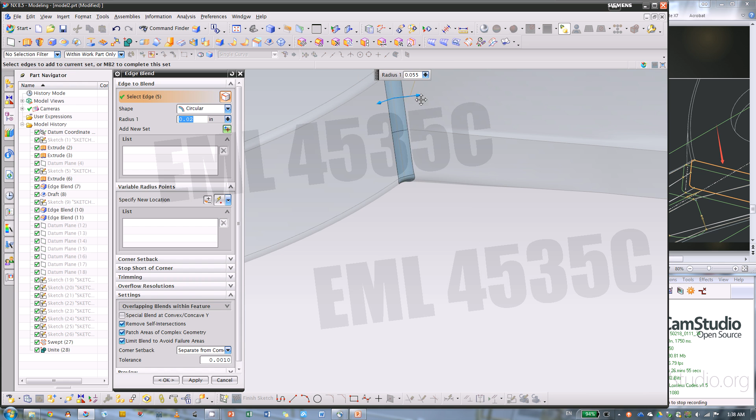Adjust to make it big, as long as it doesn't complain. Okay, so maybe 0.1 inch—see what we have here. It's 0.08, you can have 0.1 inch, that's fine. And that concludes this model.

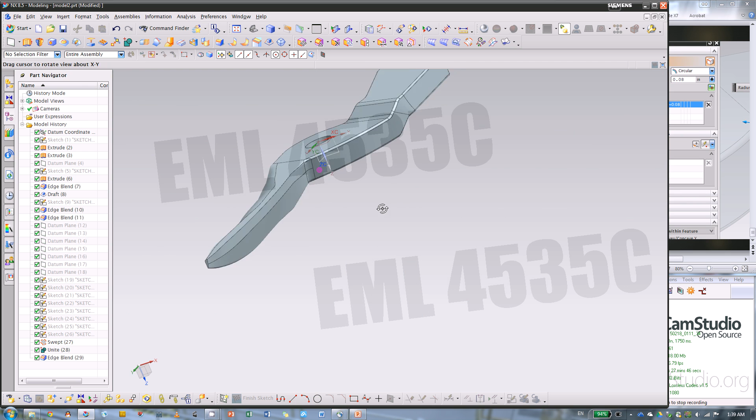So that's all for this lab. I think it's pretty long. I hope you can get a good model out of this.